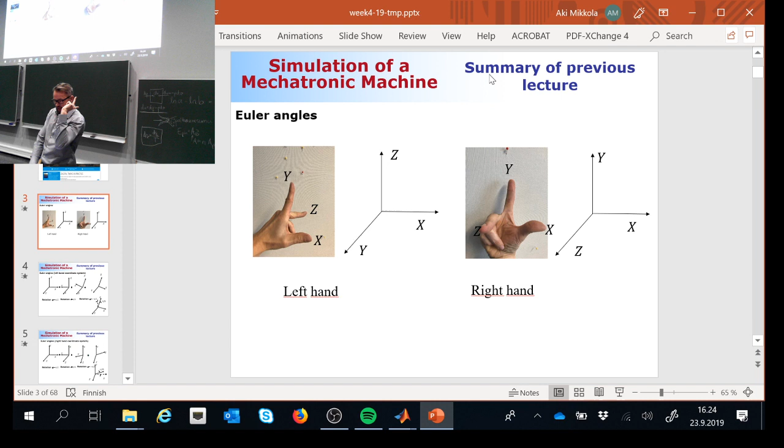Let me take a look at this one more time. Z is pointing upwards, and Y is pointing like this. I'm not very flexible, so soon I'm going to have serious difficulties here, but this is how the coordinate system is.

Then I'm going to introduce a positive rotation around the Z-axis, such that the amount of rotation is pi divided by 2, that's 90 degrees. As a consequence of that first rotation, the X-axis will take the place of the original Y-axis, as described here.

Let me change the color of this pen. Anyway, I think it's not important this time. You can still see this is due to the first rotation. So take a look: the X-axis, originally pointing this direction, is now pointing this direction, because of the first rotation of pi divided by 2, 90 degrees.

Now we're ready to do the rotation of pi divided by 6. I'm going to take hold of this X-axis here and do my rotation, which is pi divided by 6. Then I'm going to take my final rotation such that the first rotation is compensated.

I'm rotating that in a negative direction, by an amount of pi divided by 6. This is my hand drawing, so it's not perfect, but this is how it looks. Now, when you compare that to the original configuration, it appears that the system is rotated around the Y-axis.

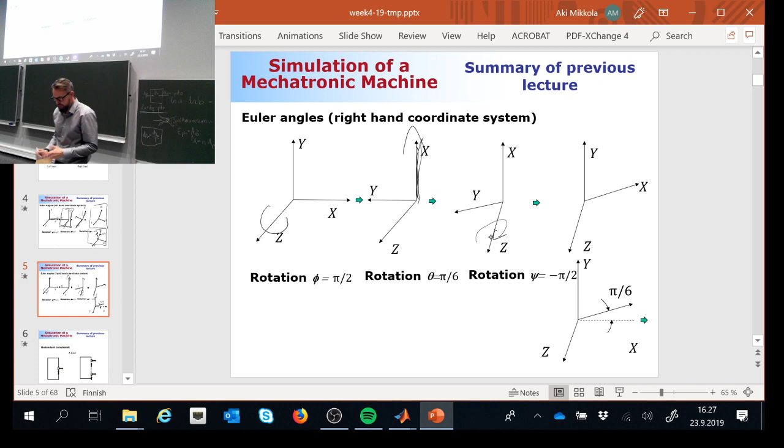Anyway, here's how it goes this time. Same procedure, but with a slightly different set of coordinates. We have an axis originally pointing in a different direction. Again, the first rotation is around the Z-axis, and because of that, the X-axis is pointing upwards. Then I introduce my pi divided by 6 rotation. Once done, I take hold of the Z-axis and compensate the first rotation with an amount of minus pi divided by 2. That's it, that's how it goes. Hopefully this explanation helps.

Let me summarize what we discussed shortly last week, and then we'll move on. We're going to take a look at the first kinematic analysis.

We discussed redundant constraints, which is often asked in written exams. What is a redundant constraint? A redundant constraint is a system that includes constraints that are not independent, but instead constrain the same coordinates, the same kind of motion.

An example is a door with two revolute joints on it. Here is my first revolute joint, and here is my second. They're constraining exactly the same motion, the exact same generalized coordinates in exactly the same way. So they are not independent; they depend on each other, and this is what causes a redundant constraint.

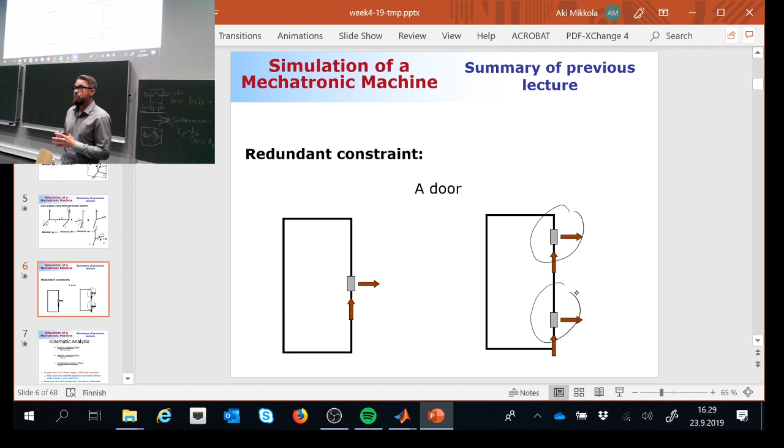A redundant constraint is not a major problem because many commercial software packages can recognize redundant constraints and automatically eliminate them. But the problem that remains is that the reaction forces due to the constraints become unclear, because it's not clear which of the constraints will be coming off from the picture. That's why it's not good modeling policy to use redundant constraints.

Okay, then we moved on. Last week we opened the topic of kinematic analysis, and concluded it consists of three steps, where the first is the most difficult. This is where we have to find the position coordinates, the generalized coordinates, because the thing we want to solve for, the question mark, is the generalized coordinates.

In the position level analysis, we use an iterative process to update our generalized coordinates until the difference needed to update the coordinates is small enough. We will take a look at that.

What comes as part of that iterative process is the Jacobian matrix. The Jacobian matrix will also be used in dynamics. Here in kinematics, it's computed such that if the constraint vector is called C, and the generalized coordinates are Q, then partial C over partial Q is what's called the Jacobian matrix. C is a vector of constraints, Q is a vector of generalized coordinates. This gives you a matrix, and if you have a kinematically driven system, this matrix will be square in size, meaning there are equally many equations as unknowns.

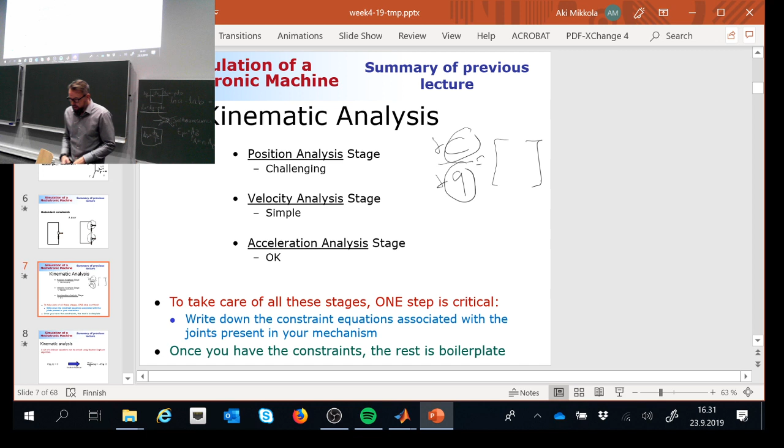So now, these are the other levels. Let's take a look at this position level analysis. We concluded this can be carried out by computing something called the Newton difference. The Newton difference is the direction, or the way, the generalized coordinate is supposed to be updated in order to reach convergence, and this is numerics. Keep this in mind, because we can measure how much we have to update the generalized coordinates.

Once this update becomes smaller than a certain tolerance, we can say that we reach the final destination. But if it's bigger than the tolerance, we have to keep walking until we reach the final destination. So that's how it goes.

So how many times do we have to iterate the system? That's a little hard to say. It depends on the application, but typically, still usually less than 10 times. Less than 10 is a good rule of thumb.

So the Jacobian matrix is the one we need in order to compute this Newton difference. Again, the Jacobian matrix consists of rows equal to the number of constraint equations, and columns equal to the number of generalized coordinates. That's what it is. So let's take a look at the first in-class quiz.

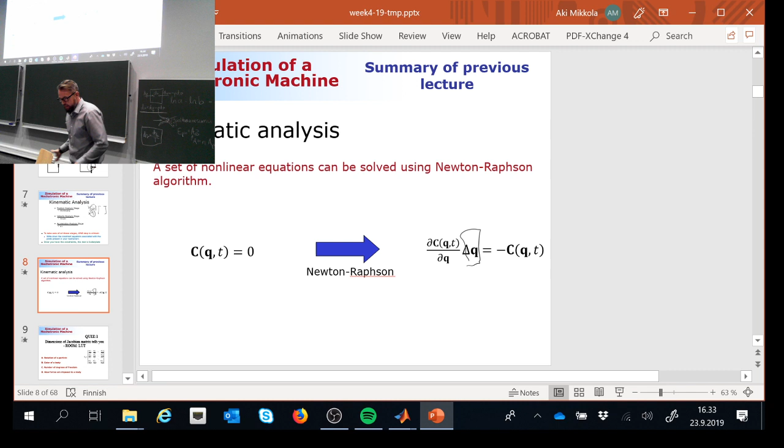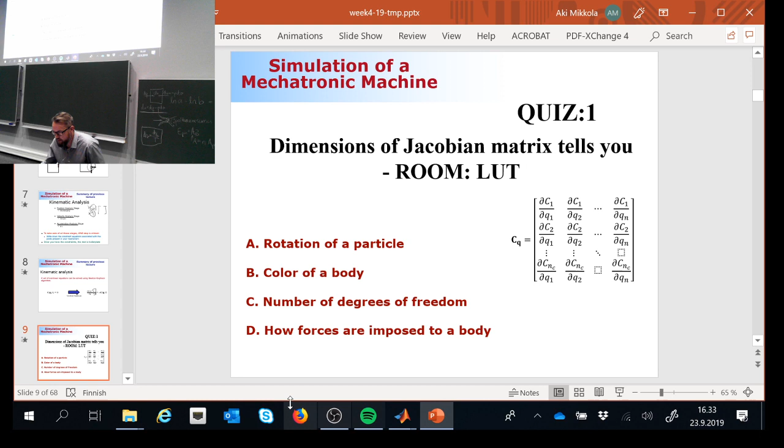My first in-class quiz is the one I showed you last week. The dimension of the Jacobian matrix tells you rotation of a particle. Okay, hold on, I don't think I have Socrative on yet. Let me put it on.

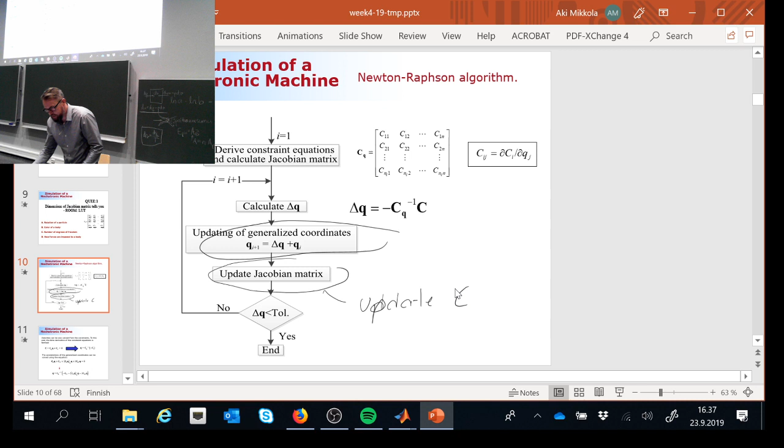Then you can check how small this Newton difference is. If it's less than a certain predefined tolerance, then you're good to go, you're ready to move on. And this is how you can solve the position level analysis.

Now the other levels are mathematically quite involved. And that's all right, because it's still mathematics, and we have tools to play with the mathematics. So no worries here, but they look ugly, they definitely look very bad. But how it goes in reality, I will explain with one example.

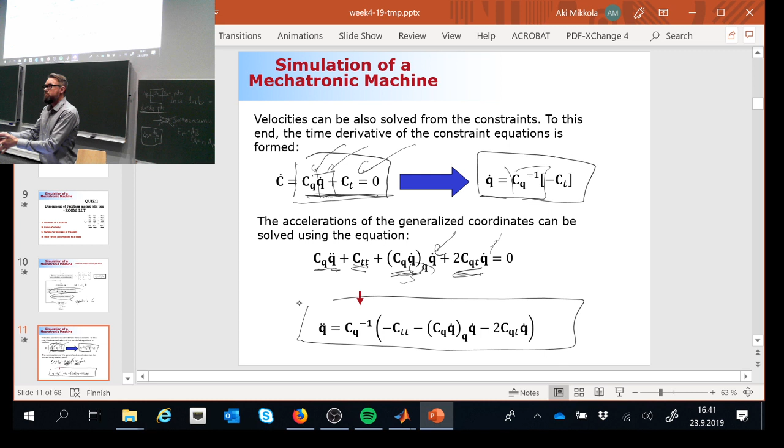Okay, so here's a summary. Position level, you need to get the Newton-Raphson, so it's about the iterative process. Velocity level, substitution. Acceleration level, substitution.

You got it. Can you do this? Are you depressed? You shouldn't be, because this is still soft, very soft, compared to the concept of virtual work. That's difficult.

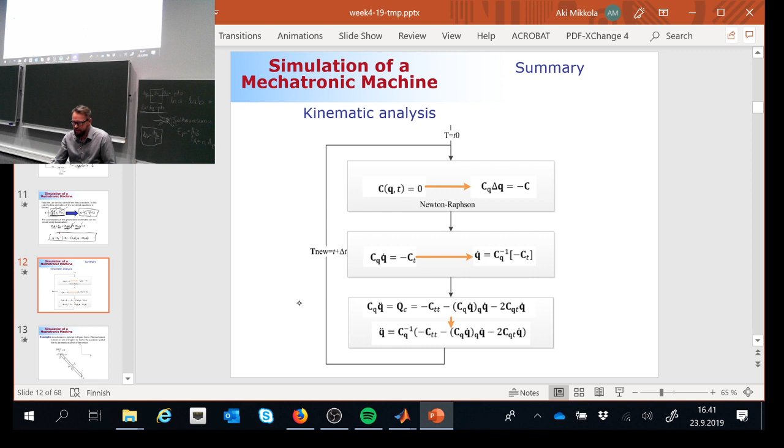How is the success rate? Above 90? But is it going to be 100% or not? 96. Who is saying 100%? It's just you and me. You don't even believe this yourself.

Think about it, think about what I was just explaining about rotation of a particle. It's like a Santa Claus, it's a myth, it's not possible to have it. Then, color of the body makes no sense, we haven't discussed anything about the color. And then forces, remember, nothing about the forces. Only thing that is left is C.

So it was. Okay, but I have good news. Good news is this: 81%, 81%. But remember, particles do not have this rotational degree of freedom. That's what I'm desperately hoping you remember out of this course. Please. And then forces, again, no discussion about the forces whatsoever so far.

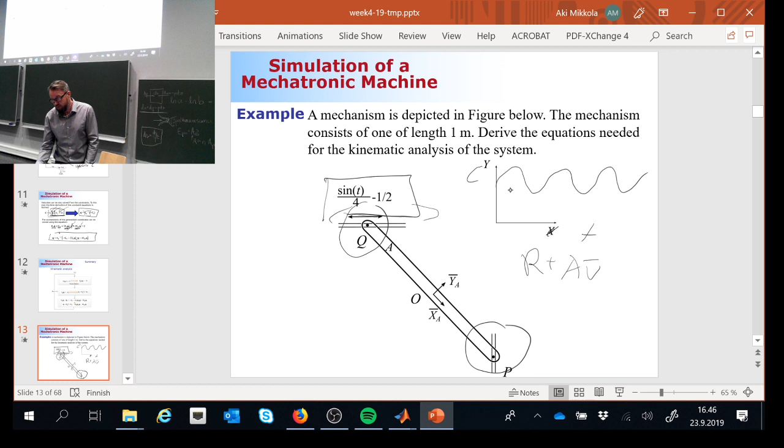All right, so what do you think? Can we solve this? Of course, because of can-do attitude. So let's make it, and not just that, but we have the knowledge to do it. If you don't have can-do attitude, and you're not following the course, it's not going to help you solve this problem. But we have both.

So let's first compute the Jacobian matrix. This is step number 1. We need that. What are the ingredients, the components that we need in order to compute the Jacobian matrix?

We have to know what is a vector of generalized coordinates. How many components do we have in a vector of generalized coordinates in this system? 3, because everybody needs 3. What are these 3 coordinates? They are translation of the body reference coordinate system, that's 2 coordinates, and rotation of body reference coordinates. So we have 3, so we have 3 unknowns.

How many equations do we need to solve these 3 unknowns? 3. How can we get it? Well, by introducing the constraints. So we have 2 primitive joints plus 1 driven joint. That's 2 plus 1 equal to 3. So things are matching, so it's possible to make it happen.

All right, let's get started. Let's take a look at this point Q, where I have 2 constraints that I impose on this system. First thing I need to do is express this point with respect to my global coordinate system, using the kinematics that I'm using over and over again. Okay, so I'm going to get started here.

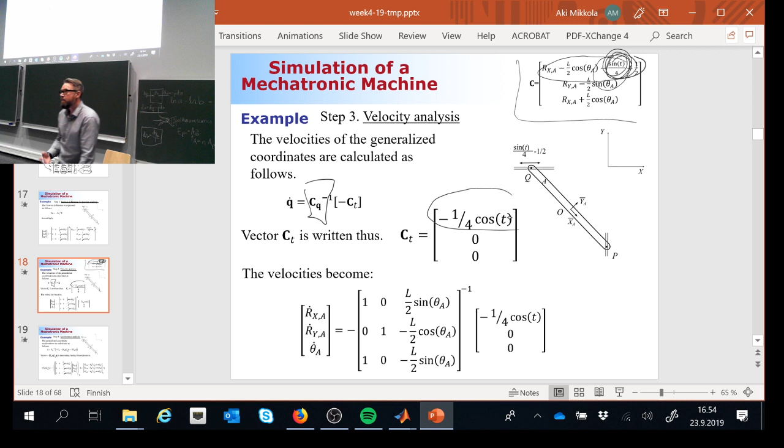Okay, so I'm going to take this one here and differentiate that with respect to time. The only thing where time is mentioned is this one here. So it's going to be minus 1 divided by 4 multiplied by cosine time. Clear? That's it.

So this is my velocity level analysis. Again, look at this - it's not about an iterative process, but just substituting the information there, and the magic equation gives me velocity.

Acceleration analysis, the same thing, a bit more involving, but other than that very mechanical. First thing that I need here is a Jacobian matrix. We don't need to discuss about that, that's already a clear-cut case.

But we need the constraint differentiated twice with respect to time. So we need to take one more step from that previous step and differentiate the constraint twice with respect to time. And then that painful component.

We just have to do it. Nothing helps. But let's make it happen. So let's take first, and this is that painful component.

So let's first take the Jacobian matrix, which is mentioned here. Now let's multiply that with the velocity of generalized coordinates. Well, it's a matrix multiplied by a vector.

Well, we know how to make it happen. It's not too difficult, let's just do it. And once we do it, we get the vector of 3 components, and this is how the 3 components reads.

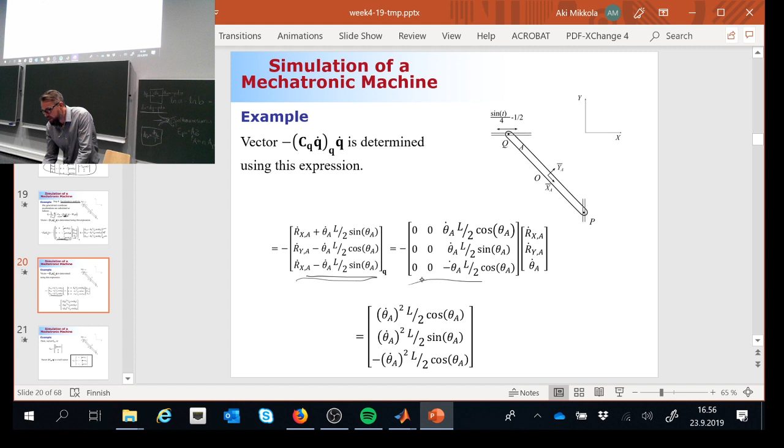Now we're going to go ahead and differentiate these 3 components with respect to generalized coordinates. We're almost there, so we're going to do this. This is how these 3 components look like. And now when I differentiate those with respect to generalized coordinates, this is how it looks.

Again, we are not paying too much attention about the mathematical details. And why is that? Because they're mathematical details, and we wanted to learn the big picture.

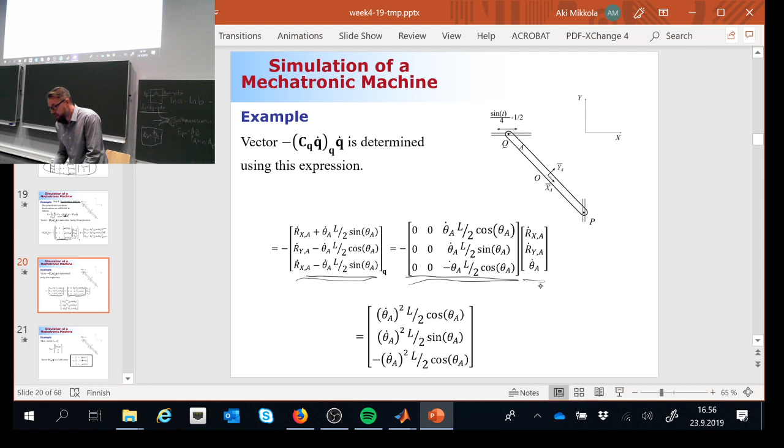Okay, now once I got these results, I'm going to differentiate and multiply that one more time with the velocity of generalized coordinates. Now this is the component that I needed in my solution, the one that I'm differentiating twice with respect to time. That's going to read like that. And this is going to be equal to 0 because the Jacobian matrix is not a function of time.

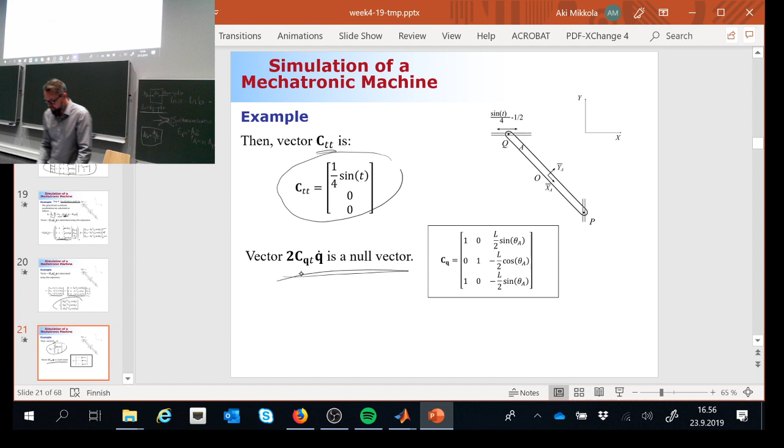Okay, so you're ready. Next what will happen is mind-blowing. Seriously, because I already introduced these equations to MATLAB.

We're going to solve these kinematics. So are you guys ready? Breathe deep. Take a good hold of your seat because it's going to be really magnificent.

I'm not going to take a look at this equation, but instead I'm going to move on to my MATLAB. MATLAB is here. We can take a look at these examples or this implementation later.

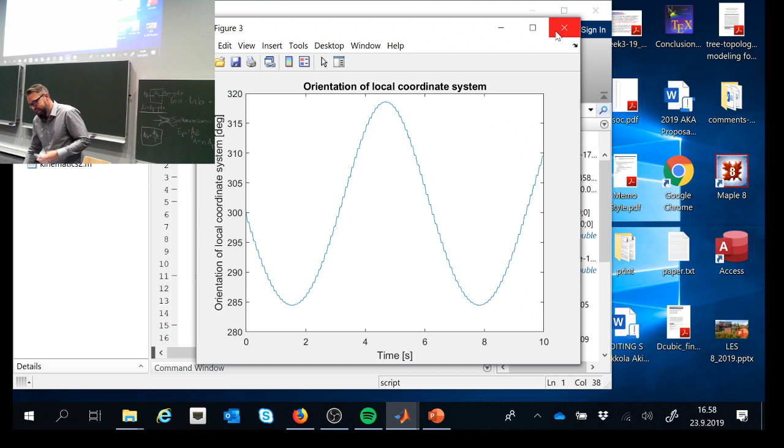Now, with your knowledge, you can solve the kinematics. Let me summarize. I have here angular acceleration, angular velocity, orientation of the local coordinate system, x position, and so on and so forth. I can plot all this information. Beautiful, absolutely beautiful, isn't it?

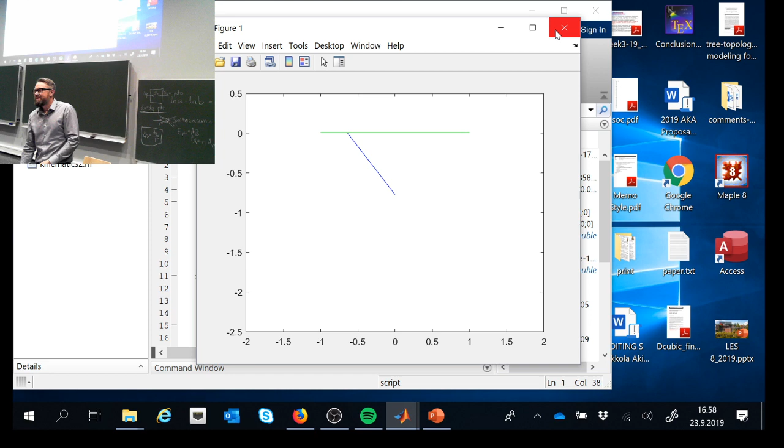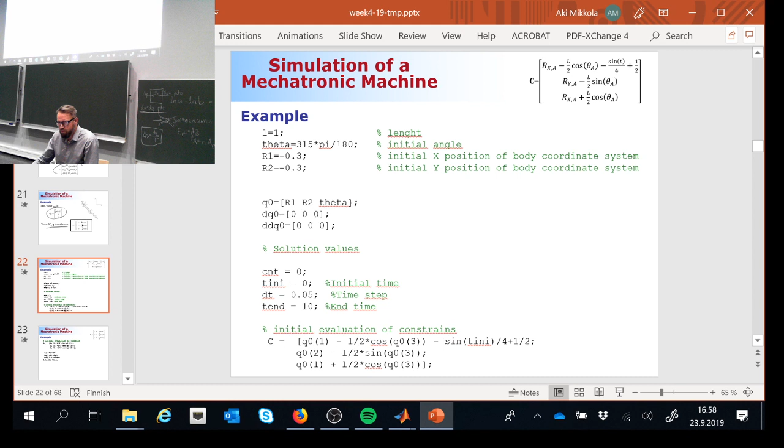But you're not crying. Okay, but let's look at the big picture again. I'm going to put these MATLAB files on the Moodle site so you can take a look at them if you want. But let's look at the big picture again.

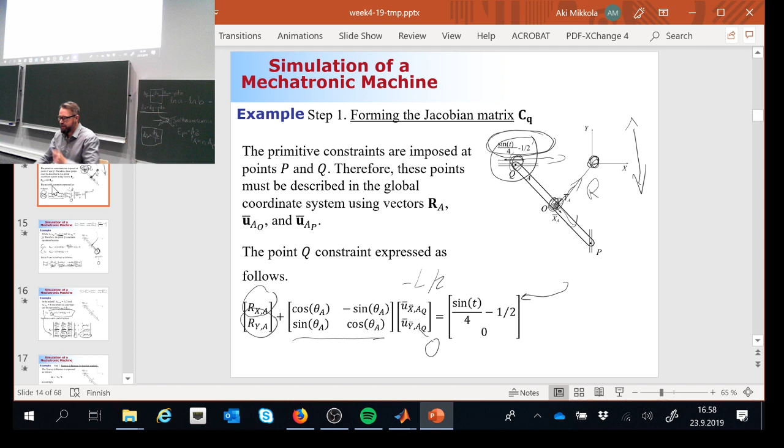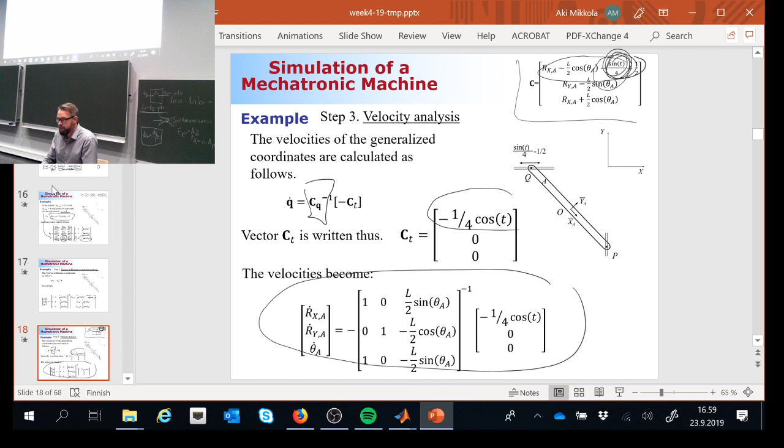We were following certain steps. Number 1, create the Jacobian matrix - you can make it happen. Number 2, Newton-Raphson for position analysis - you can make that happen too. Number 3, velocity analysis. Number 4, acceleration analysis. Done. And here is exactly how the multi-body system dynamics goes. You're just following the 4 steps as explained in these previous slides, and automatically you get everything you need in order to carry out the kinematic analysis.

In three-dimensional space it becomes more complicated. The difference between 3D and 2D space is that the rotation matrix becomes a little bit painful. This is not a serious problem in kinematic analysis, it's not a serious problem in dynamics either. It becomes, well, a headache at least, if nothing else.

Why is that? Shortly, I can explain why. And I can guarantee you this: there's 100% certainty that what I'm going to explain you will not understand. Still, I'm going to explain it to you. Okay, so what's the deal in a 3-dimensional space?

In a 3-dimensional space, angular velocity consists of 3 components - this is supposed to be omega, excuse my writing. So omega, which is angular velocity, consists of 3 components. Those could be associated to the body reference coordinate system or the global coordinate system - either way, it doesn't make much difference. This is a vector that consists of omega x, omega y, omega z, which are angular velocities with respect to 3 different coordinate axes.